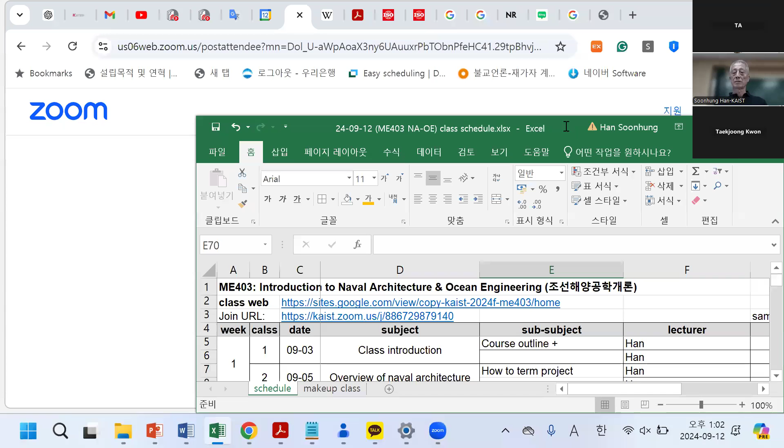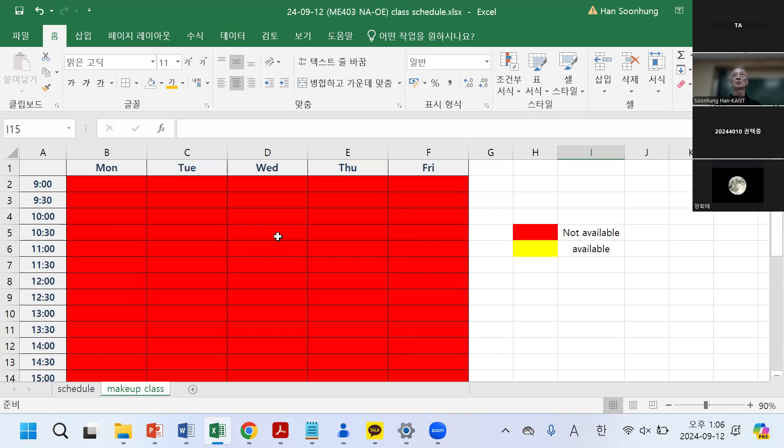Schedule conflict, unique or insurance program. We find out how can we treat, probably make the class hour. This is a previous semester result, so everybody has a different schedule. We find out an empty one. But this one, these two empty slots were found last semester. Similarly, somehow together with the TA, we find out empty slots so that we can use in emergency cases.

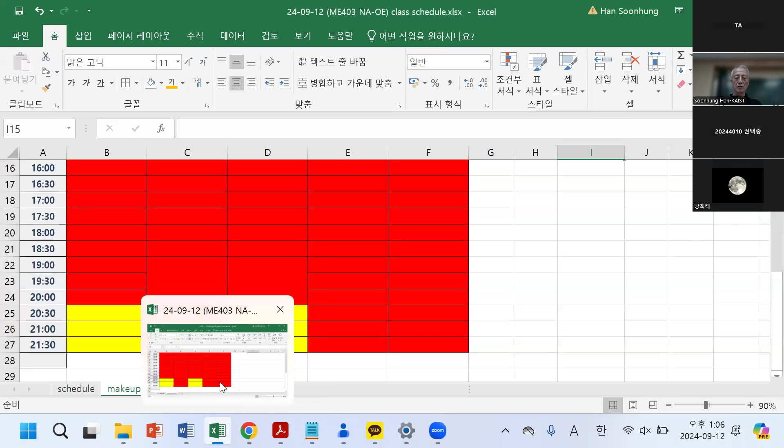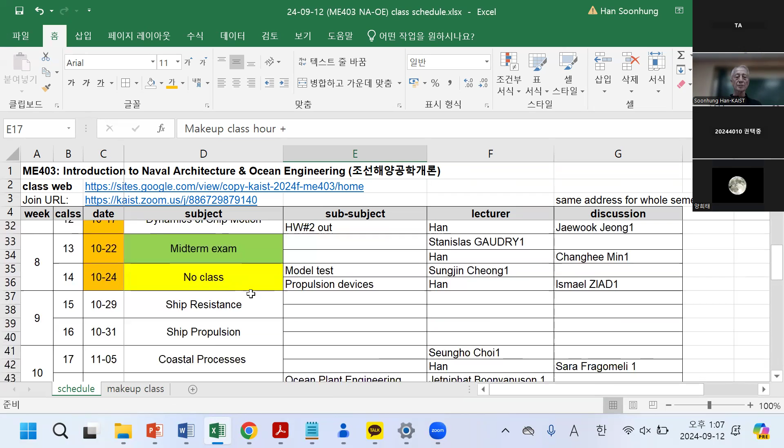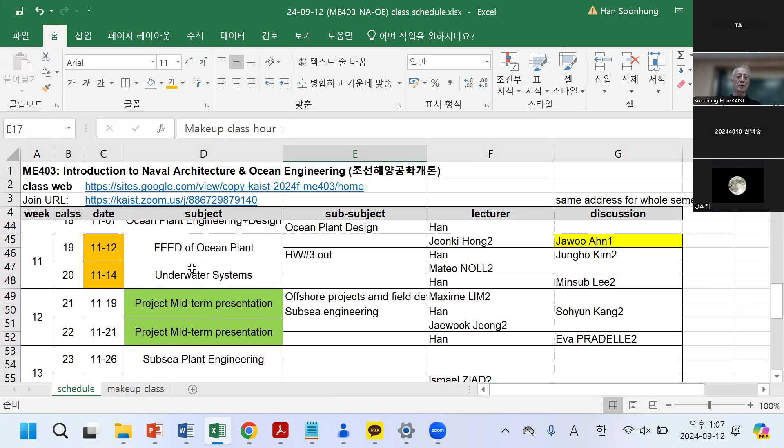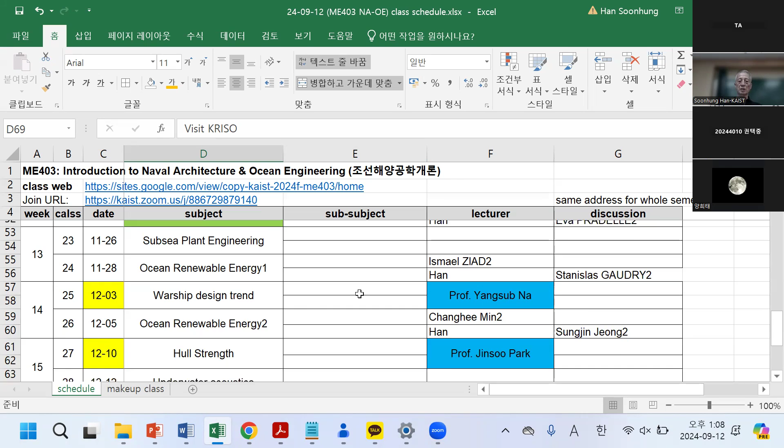And because the time slots are many available, so that we need to have a separate schedule for the increase. Last semester, I found that only half of you visiting KRISO. We may not use regular hours, we use separate hours, something like Friday or something, depending on your speech. And last time also we get a special lecture, and whether it's available.

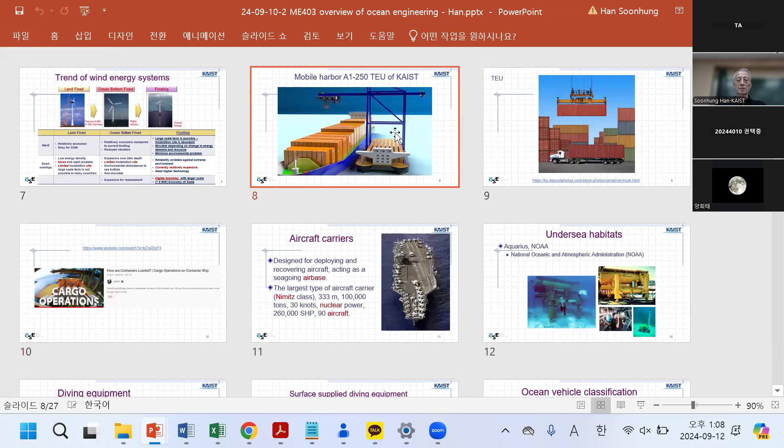We start here. Mobile harbor.

Well, this one is, you can say, a floating container, usually it's fixed. Moving container crane, it's a small container. It can be bigger, but depending on the situation, it's only 250 TEU.

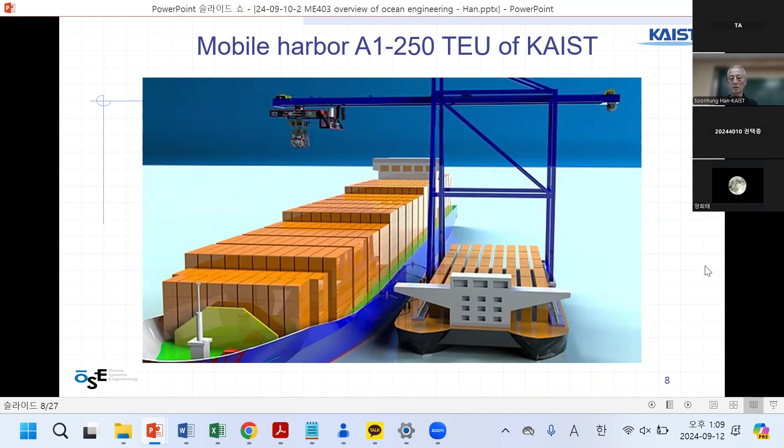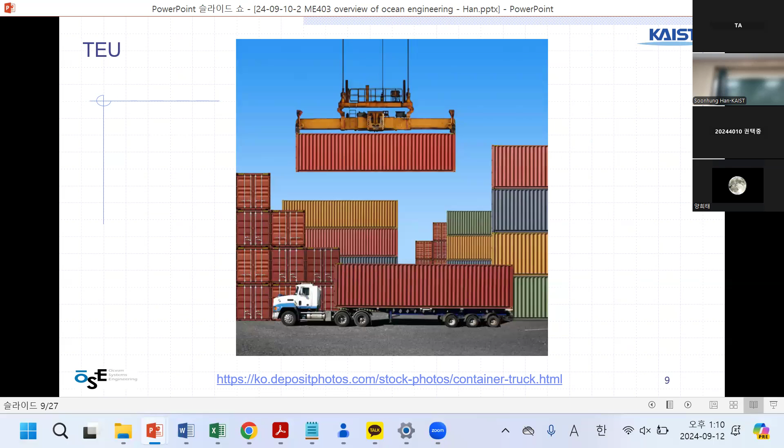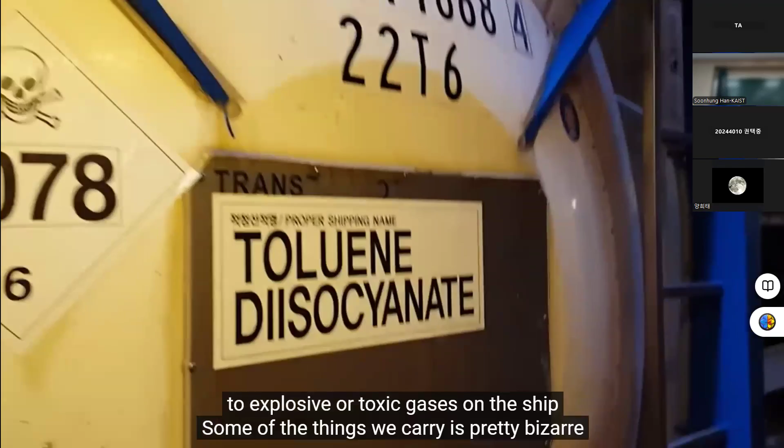Let me show you how containers work. It's possible that most things around you right now came from a container ship - the food you ate, the phone or computer you're looking at. We have anything from apples to frozen meat to explosive or toxic gases on the ship. Some of the things we carry is pretty bizarre.

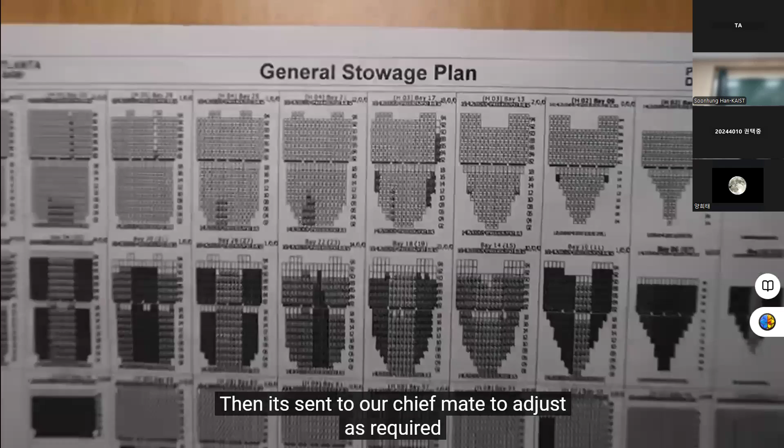But everything actually begins in the office with a team of people we call central planners. They draw up a cargo plan for the whole supply chain. Then it's sent to our chief mate to adjust as required. The containers are loaded by the port's crane. Some say they were used by the Empire.

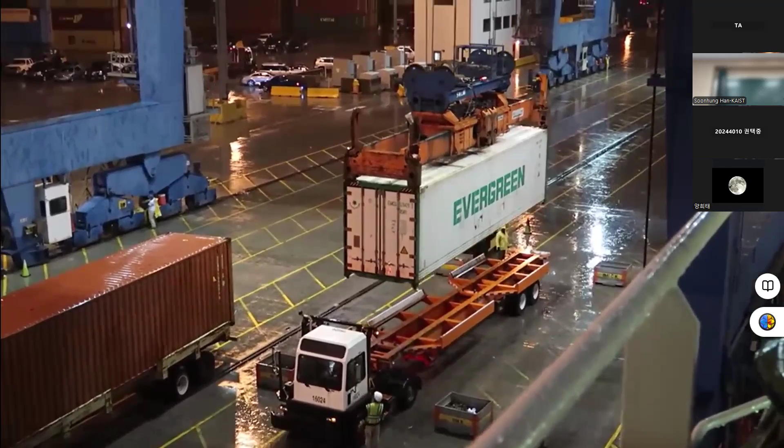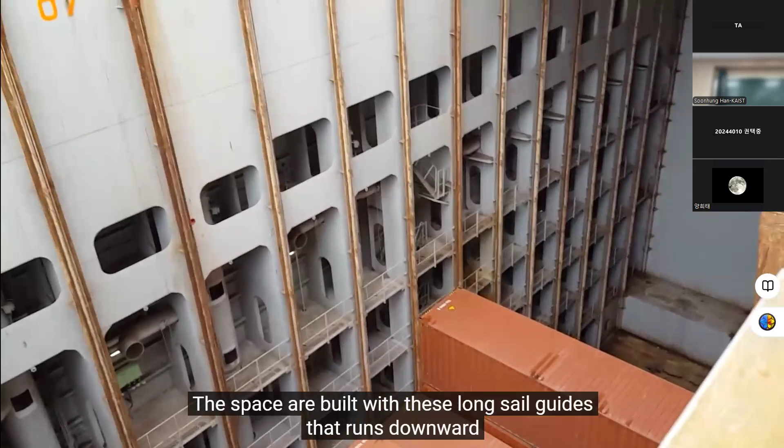Starting from the bottom, stacking up like Legos, these cargo holds can be as deep as 40 times 40 meters. The spaces are built with these long cell guides that run downwards, it secures the containers in place. And this is what an empty container hold looks like.

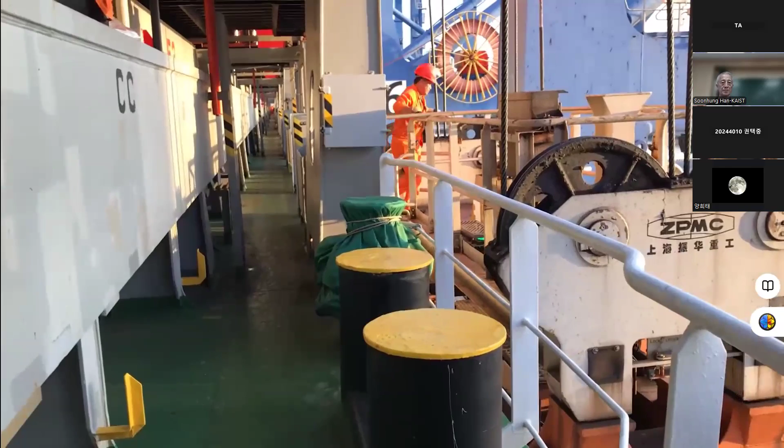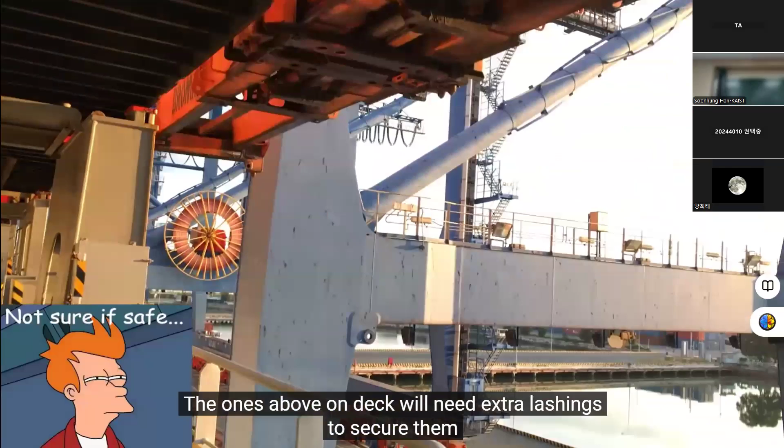Once it's filled, a hatch cover is placed on top so that more containers can be loaded. The ones above on deck will need extra lashings to secure them. Workers from the port handle the physical labor of lashing.

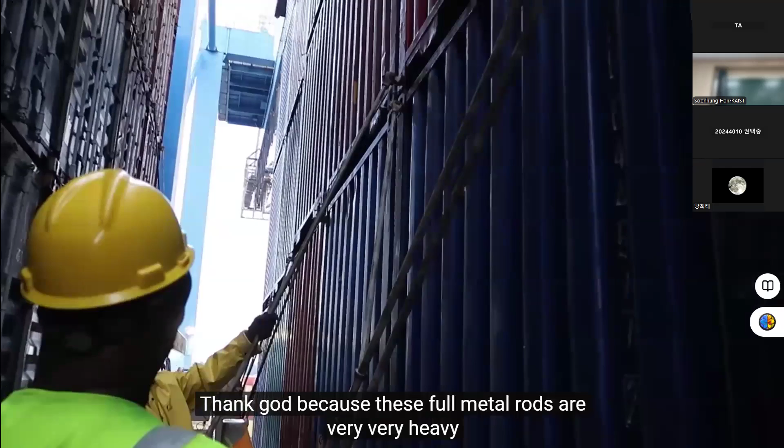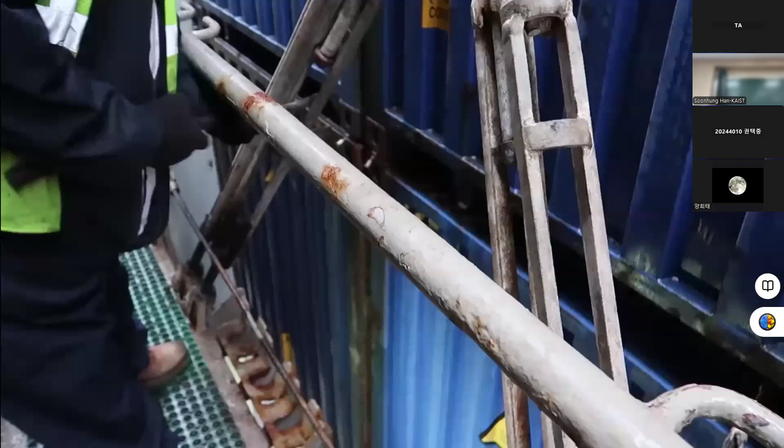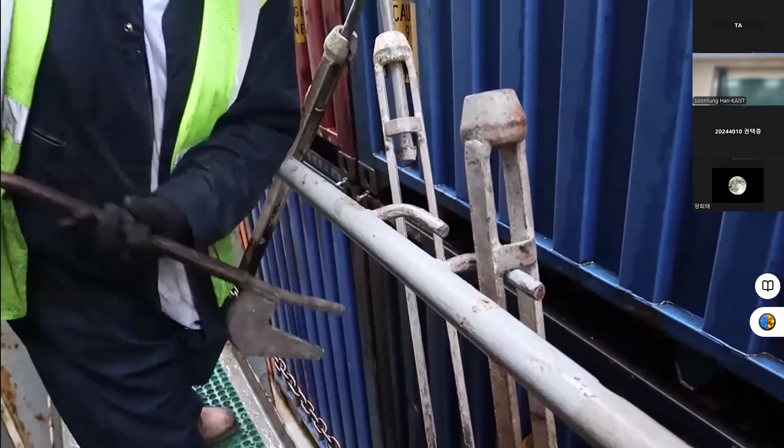Thank God, because these full metal rods are very, very heavy. Turnbuckles are twisted to tighten the steel rods. For that, we have turnbuckles, short bars, long bars, and twist locks.

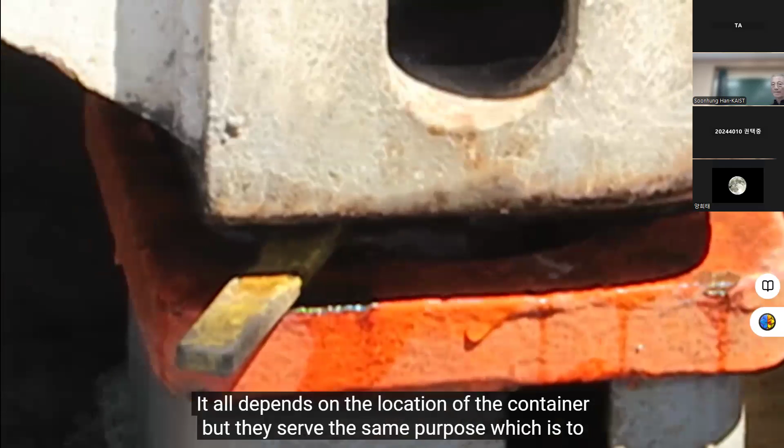There's actually a few types of twist locks on our ship. Some are manual, some are automatic. It all depends on the location of the containers, but they serve the same purpose, which is to lock containers. Once again, it really is just like stacking Legos.

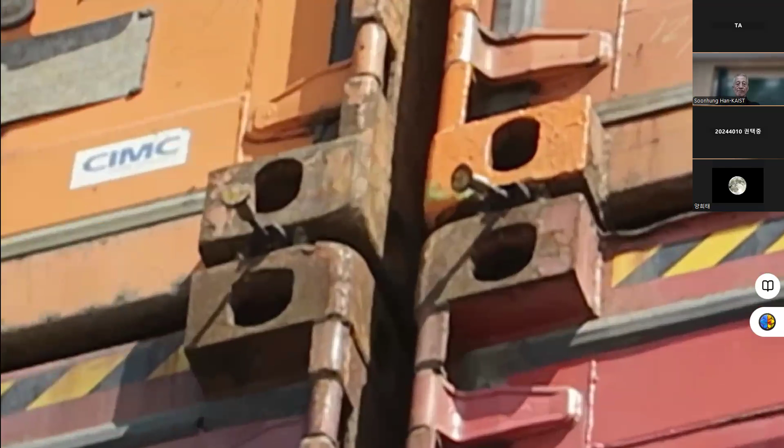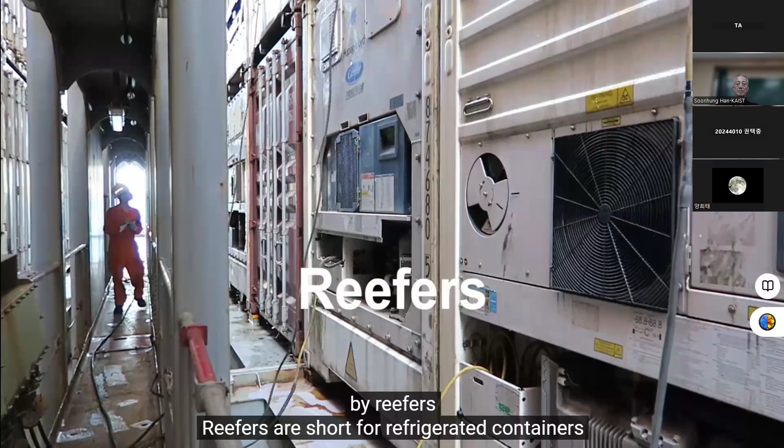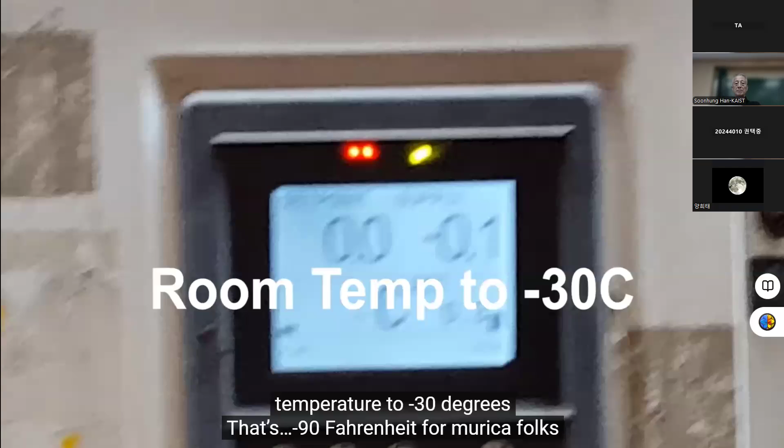The fruits and frozen products are transported by reefers. Reefers are short for refrigerated containers. They are pretty much a gigantic portable fridge. It can keep temperatures anywhere from room temperature to negative 30 degrees - that's negative 90 Fahrenheit for America folks.

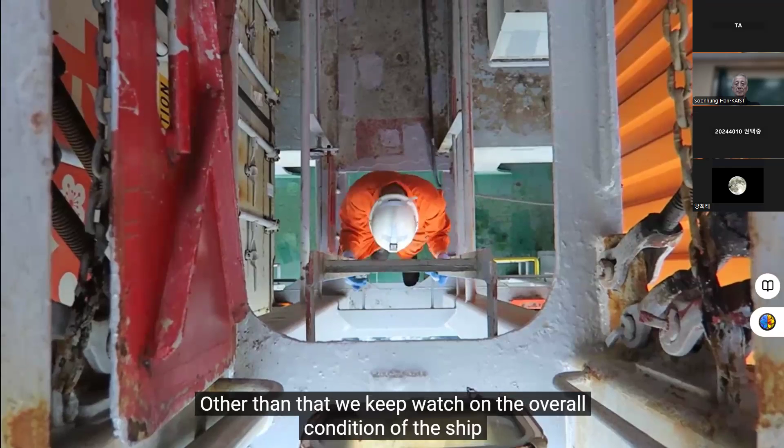So what's my part in all this? Well, as third mate, my job during cargo operation is to monitor the loading and discharging progress. Afterwards, checking the lashing to make sure it's done properly. The last thing we want are containers falling to sea if we ever run into bad weather. Other than that, we keep watch on the overall condition of the ship, including safety and security, checking the mooring lines and looking out for any suspicious activities like stowaways or pirates.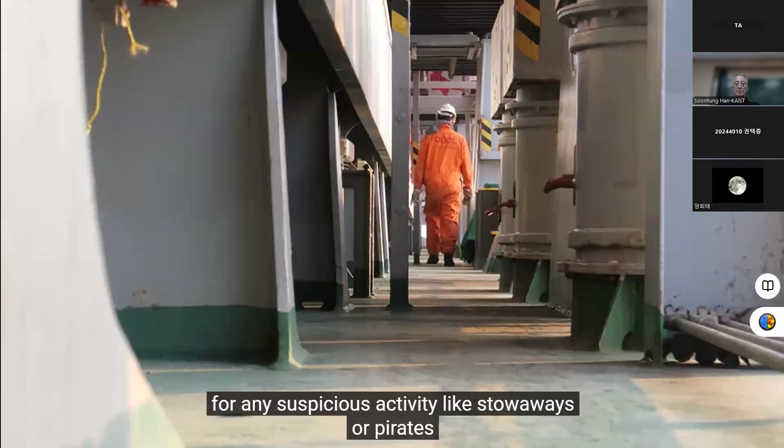So that was a general overview of how cargo operations are done on container ships. If you got any specific questions, make sure to leave it down in the comments below. And as always, thanks for watching.

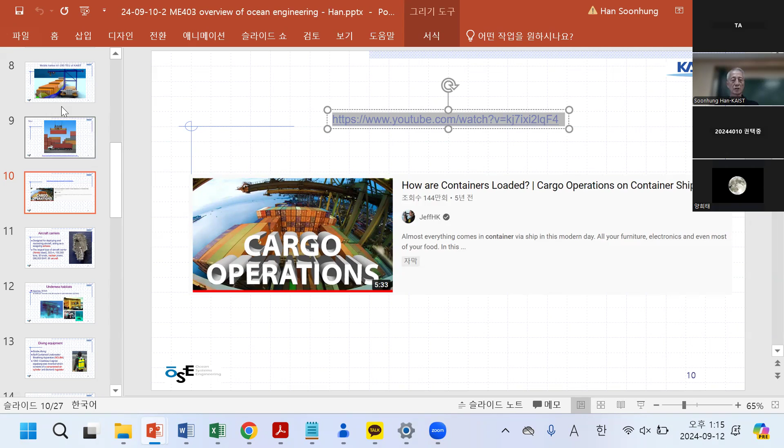Storage planning, because large container ships nowadays carry 15,000, 20,000, 50,000 container TEUs, containers per ship, one big ship.

So they start from Japan, Korea, China, Shanghai, Hong Kong, Singapore, then Middle East, and go to Europe. Otherwise, the other way is from Singapore to China and Japan to the West, Los Angeles, United States. From Far East there are two main lines, one toward Europe, the other to the West. But they visit several big ports.

At each port you need to unload 10% or 20% of the containers on board, and also load about the same amount. 10% or 20% means how many? 1,000 or 2,000 containers. But if you have not planned well which ones should be unloaded are far under the bottom stack, then you need to take out all the ones above, pick out and unload, then pack up again.

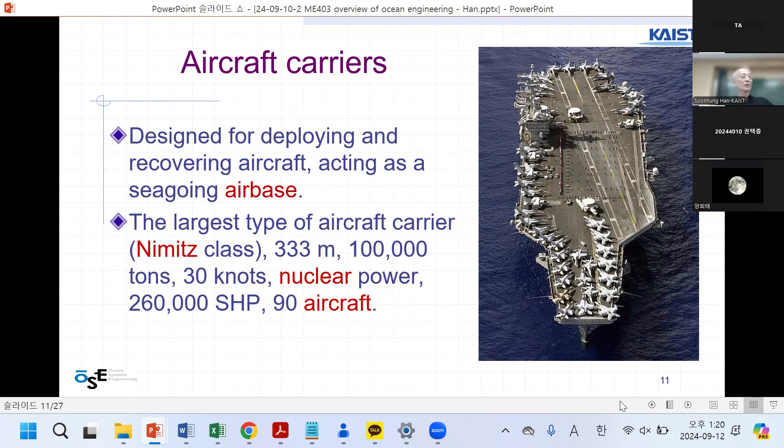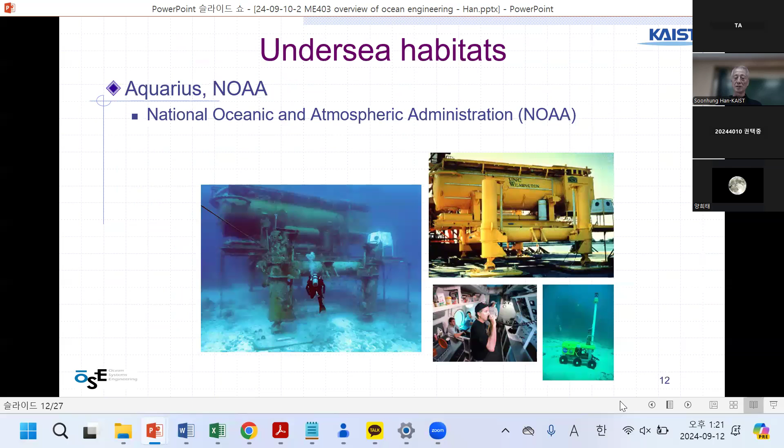It is for research and experiment. NOAA is the United States National Oceanic and Atmospheric Administration. We have experimental devices, scuba diving.

I noticed several of you have tried scuba. It's a short name for Self-Contained Underwater Breathing Apparatus. It was developed by a Frenchman, how many years ago? 60, 70, 80 years ago. He invented the compressed air cylinder and regulator, which means you need to pressure it down, otherwise the pressure is too high.

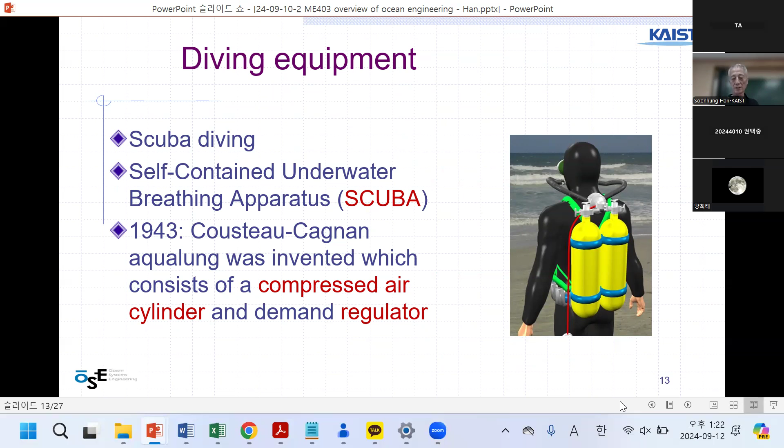You need to control the regulator, because if you go down into the water, the pressure gets bigger, right? Every 10 meters, one more atmosphere of pressure. So at 30 or 40 meters, it's 5 times. You need to turn the regulator and adjust, otherwise you cannot function.

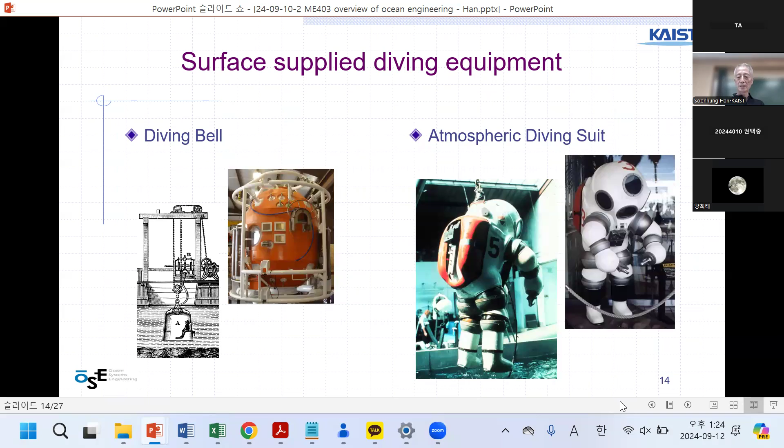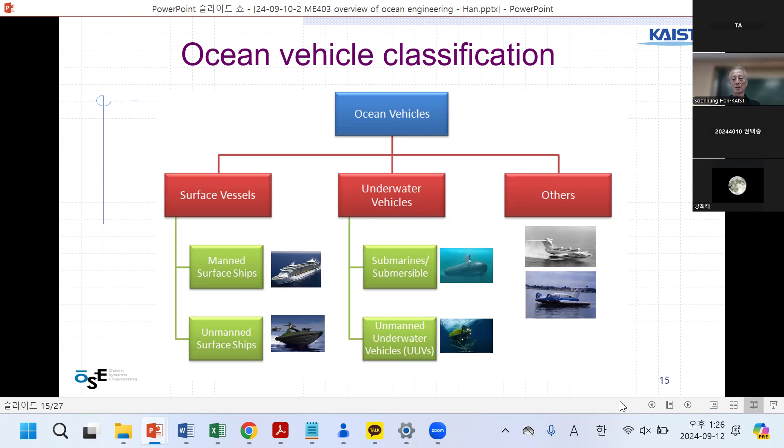Submarines and submersibles look similar, but usually submarines are used for Navy ships and submersibles for researchers. This one is from Japan, the Shinkai 6500, meaning this ship can dive to 6,500 meters. Because it's for research they need to go much deeper. Submarines don't need to go as deep, they usually stay around 100 or 200 meters.

I can't remember the English name of the book, continental shelf, right? Near the land, ocean depth is about 200 meters over the territory of a country. So Navy vessels need to stay around country lands. You don't always need to cross the big ocean, but usually the problem is coming near the continental shelf. So sometimes they go further, designing military equipment for higher access, probably several hundred meters or so.

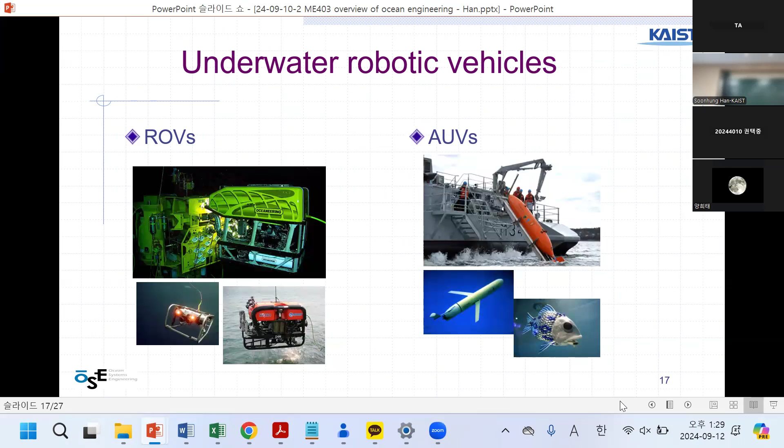Unmanned ships are coming nowadays because nobody wants to stay as crew for several months on a ship. It's not a good job.

I met a person who was working on a Korean container ship. He originally came from Russia. Somehow I had a conversation with him. He said his ship runs between Busan and Los Angeles, and it takes about 2 weeks to arrive at Los Angeles from Busan, I can't quite remember exactly. Anyway, he said the time changes by 1 hour per day, earlier, because of the economics of running the operation. They stay at Los Angeles for one or two days only, then return back over the 2 weeks. This time, the clock changes the other way, so 2 weeks means almost 12 hours of change. He stays on the ship for 3 months, then can have 1 month off.

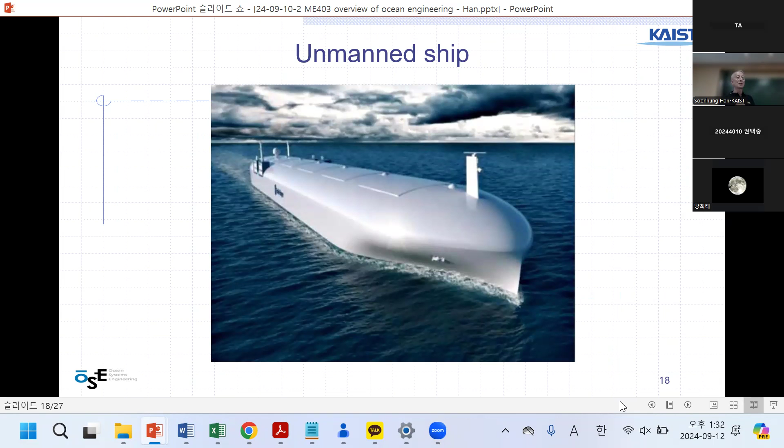Another idea from Rolls-Royce container ship design, we see that there is no pilot house, no captain. An ordinary ship should have such a high-rise captain space where the captain stays.

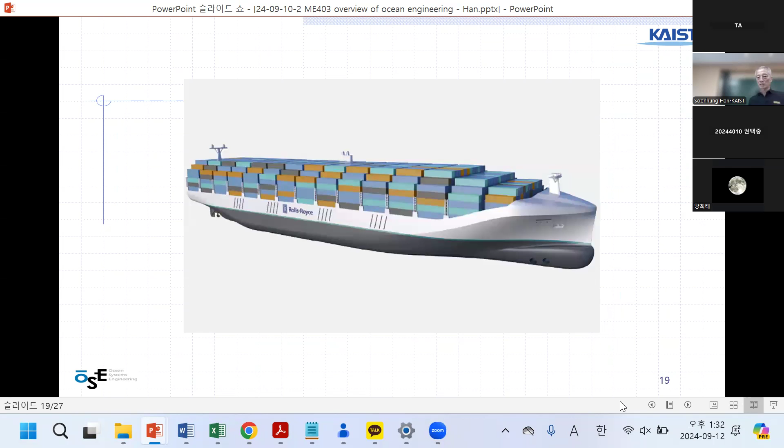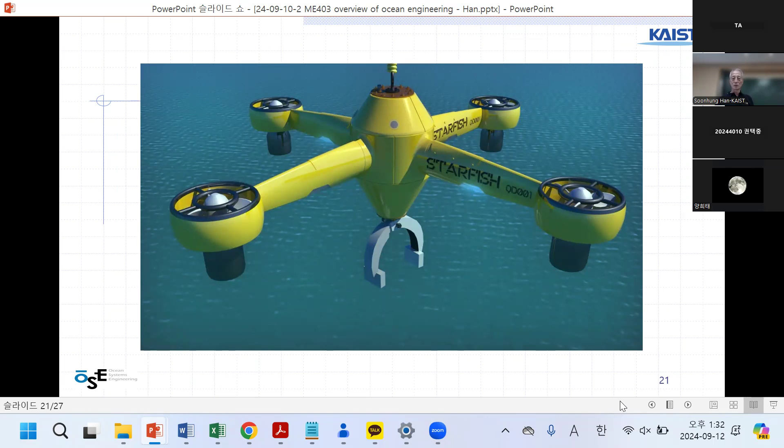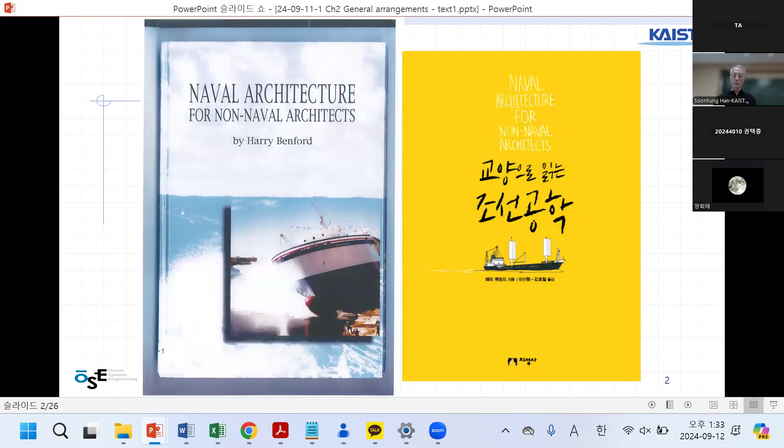So, general arrangements. This is covered in the first textbook, and the second chapter is general arrangements, principles and sample illustrations.

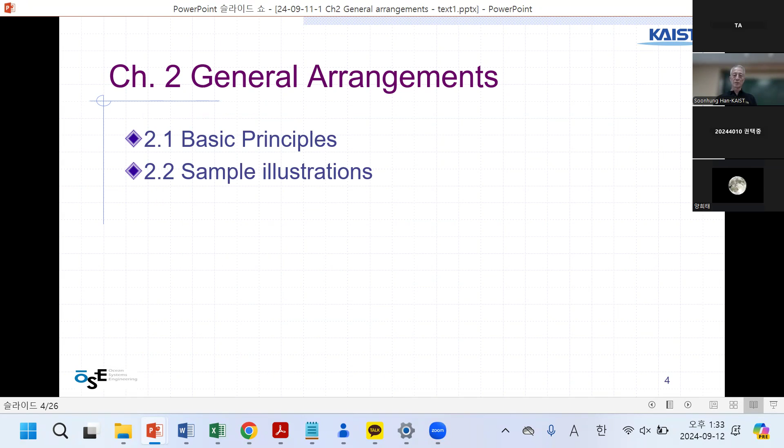When you have a job in a shipyard or shipbuilding company, you may be located in the R&D department or in the yard. There are thousands of drawings needed to build a ship. To build this building also, you need hundreds of drawings.

For each work per day, we need professional drawings for a single project. That's why we have many drawings. But the main key drawings of a ship are three. As a student, as a naval architect, you need to know how to draw these. One of them is the general arrangement, covered today. The other is lines, and the third is the midship section. We will cover this.

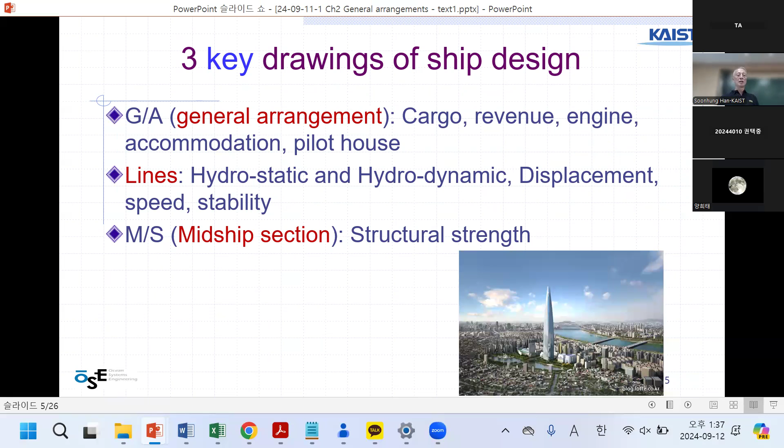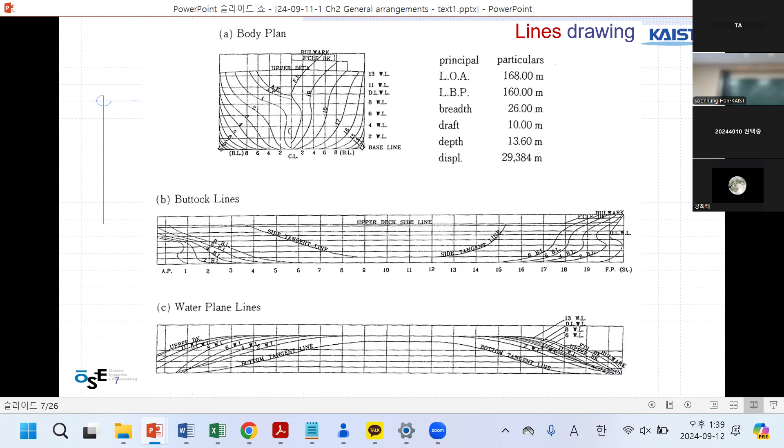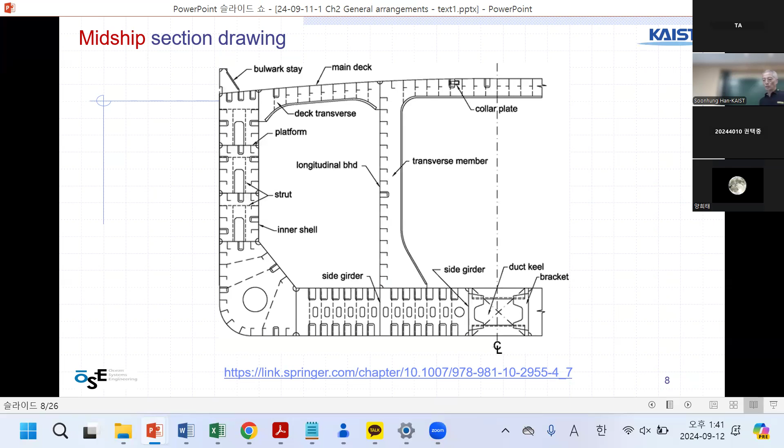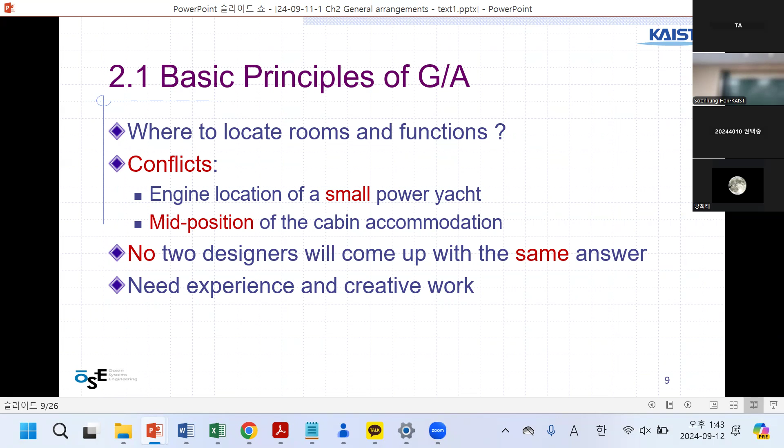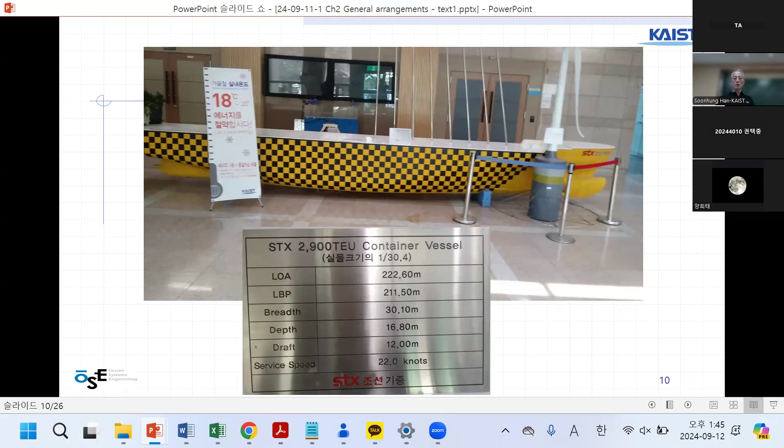The main cause of using that big swimming pool is to guarantee the speed for the ship. Otherwise it's not easy to expect or estimate the engine size for the speed from your design. So sometimes you may try to visit such facilities.

Principle: primary function should govern the design. Very reasonable. For example, a fishing boat - start by locating the fish catching equipment. But fish catching has different ways: hooking or netting, and netting can involve cruising and putting devices out and collecting them back. There are many different ways of catching fish depending on the fish types - very complicated. That's why you need a different device for catching fish, and the device is important for fishing vessels.

Similarly for cargo ships, cargos are different. Container ships use cranes for cargo handling. How can you handle the cargo, and then move it off the ship - loading and unloading through openings, or with no openings at all. You see that with cargo ships, and then there's location.

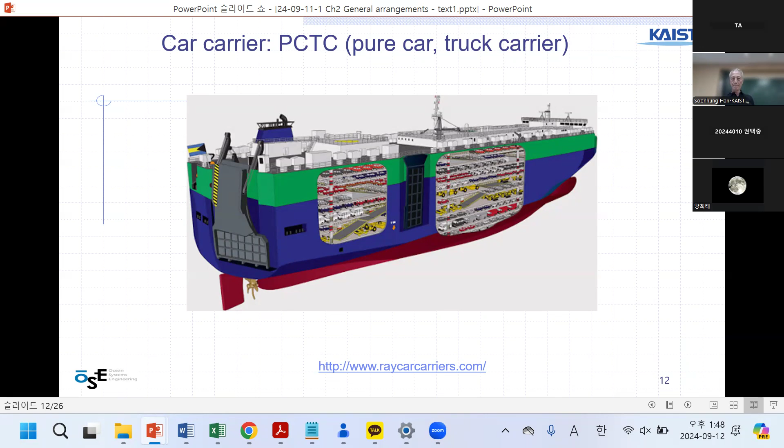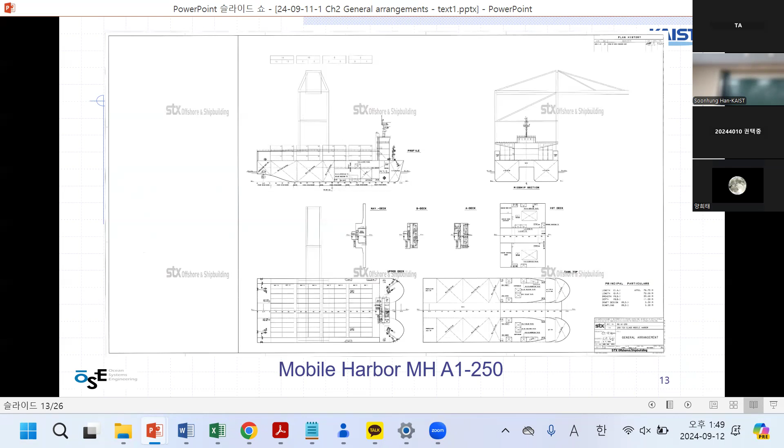When I was young, I was working in KRISO, the research laboratory. At that time, my duty was to design a new small fishing boat - 50 years ago, 40 years ago, a long time back. At that time, fishermen in Korea were very poor, so they didn't have enough money to buy an engine-powered fishing boat, which was very expensive. I found that the diesel engine for a fishing boat was 3 times more expensive than a land-based bus diesel engine for a bus or truck, with the same power, same horsepower. So as a young engineer, I wanted to use that land-based engine rather than a specialized fishing boat diesel engine.

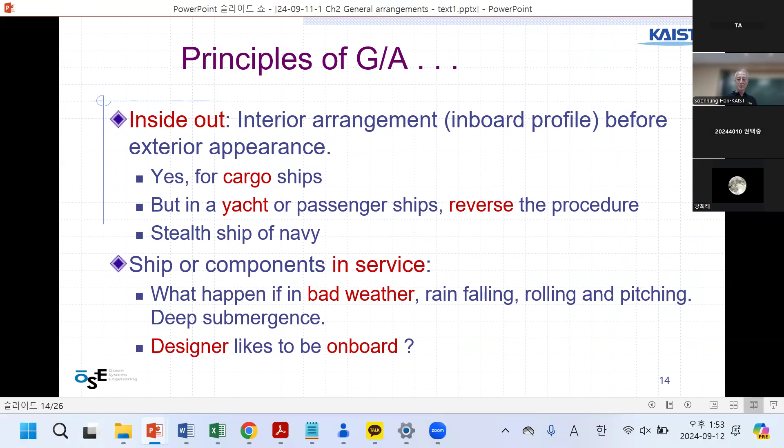Stealth ships - this is a Zumwalt class Navy stealth destroyer. It's a type, size, and function class of Navy ship. It has a stealth function - note the name or class name. You see this one has a different angle. The shape is very different - usually ships have a straight superstructure, but this one has a reverse angle to create the stealth function.

Why? Maybe because it reduces the radar cross section, giving less chance of being detected by radar. Radar works by shooting electromagnetic waves, and the returning wave is detected, right? But with this shape, the wave goes off into other space.

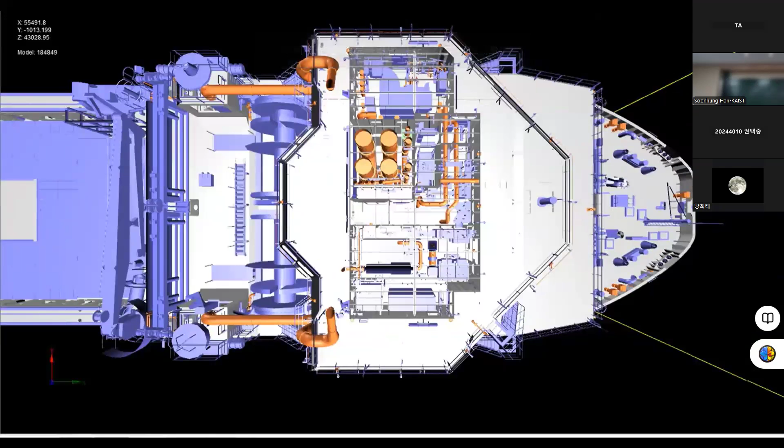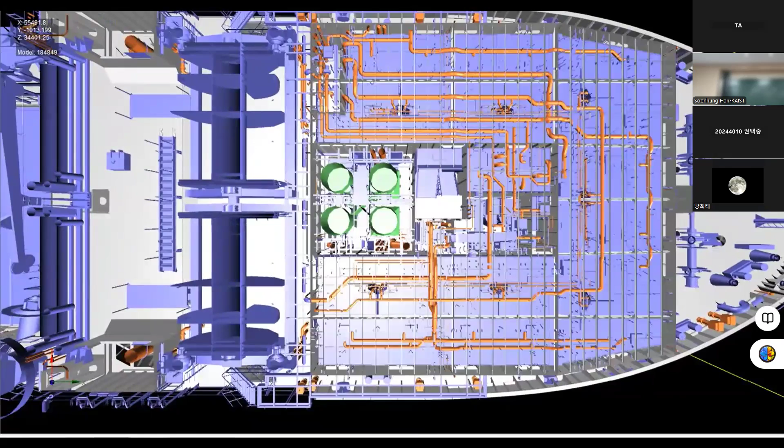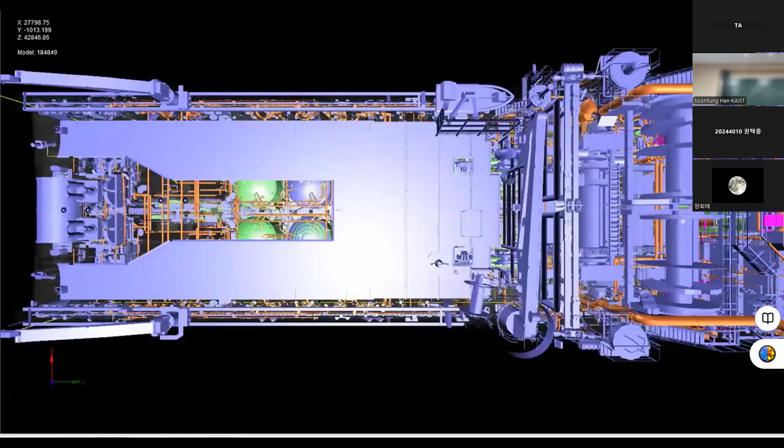This shows a very good quality CAD system compared to design systems of the past. When I was a student 50 years ago, we drew general arrangements with pen and pencil. Nowadays, computers do this. You can see this one is already finished, and you check whether the design is good. The function shows you can go down floor by floor, or up, everything together depending on your need. That is the high quality CAD system for ship design.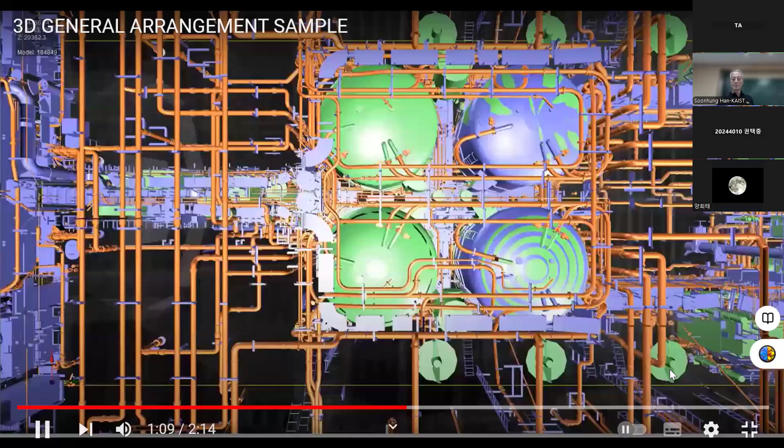Looks like an engine room. Only the piping is shown here, so you can select what you want to see, highlighted by color changes. Only this unit shows the engine. It looks like 4 diesel engines are used for 2 propeller shafts. There should be a propeller here, and exhaust gas goes out.

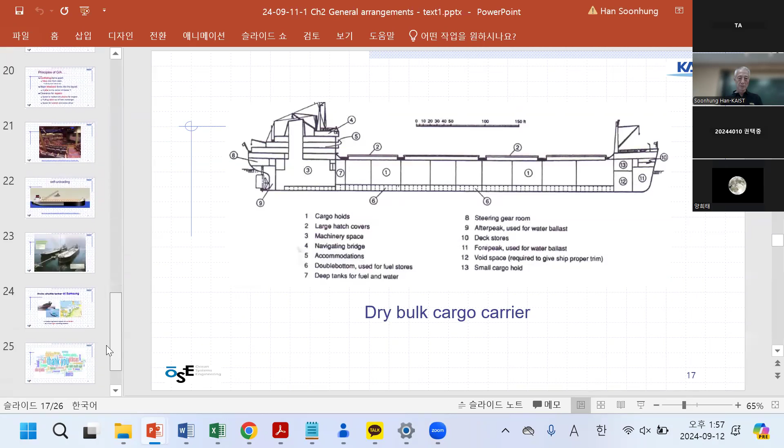As an experienced designer or engineer, if I see the picture, I can tell what type of ship it is, because they have special factors. This one is a dry bulk cargo type - dry, not wet. Wet means oil, chemical, or LNG carriers.

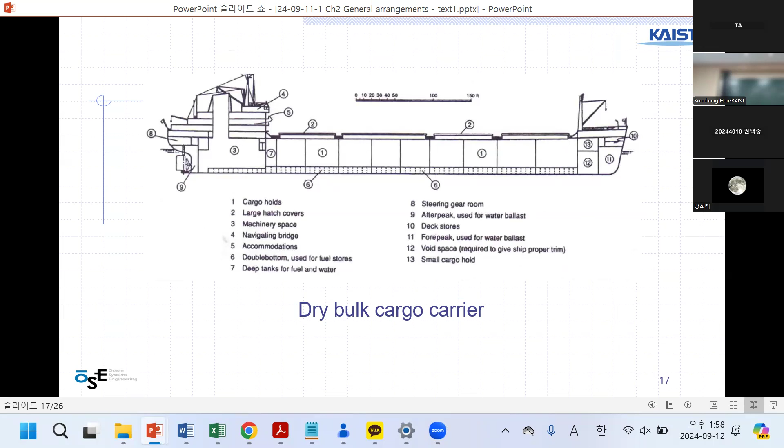This is a sample of bulk cargo, with pilot house and cover tank.

If you go shopping at a supermarket to buy candy or peanuts - candy is bad, peanuts are also bad nowadays - but at some corner you can make your measurement with such peanuts. We call this dry bulk sample.

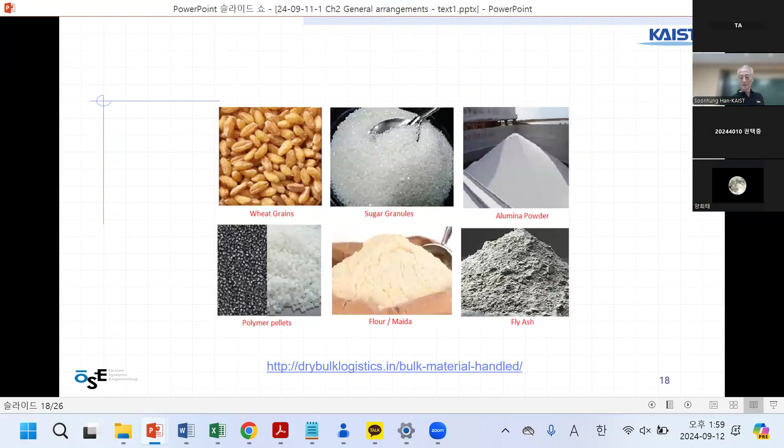For ships, this is a dry bulk cargo ship. It has hatch openings - you use a device to open it this way, each cargo hold opened, and they put grain or ore in it. Ore means for steel-making companies, you need to import it. Korea imports ore mainly from Australia or Brazil, so it's heavy and bulk.

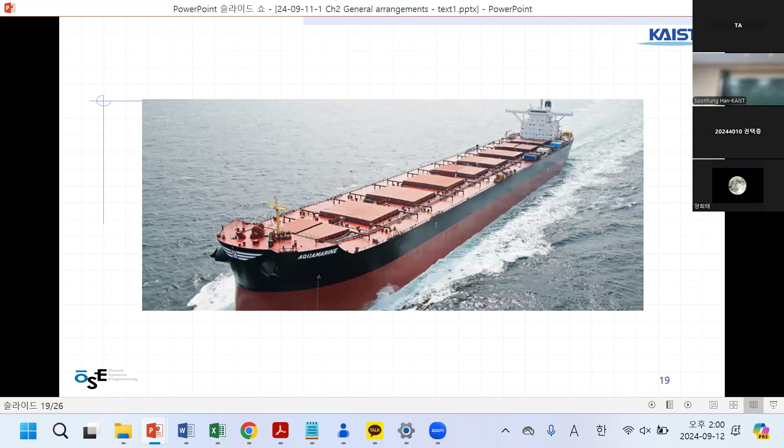Conflicting items should be kept far apart. Noisy items should be away from the cabin, meaning accommodation - engine and accommodation should be separated. Cooking should stay near the food storage house. Toilets should be in a convenient place.

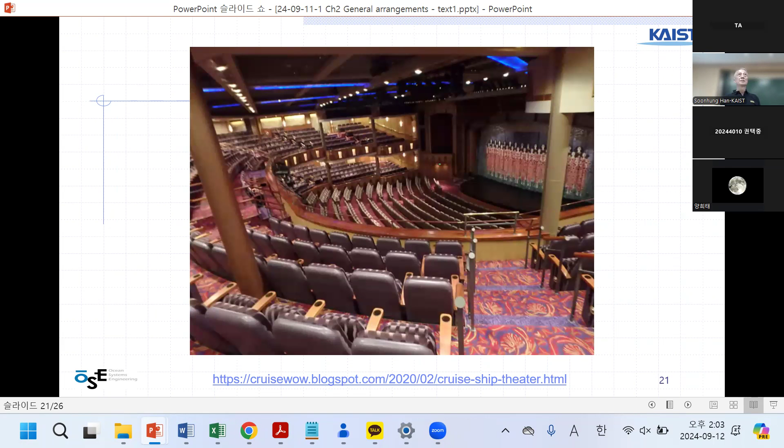Say this is grain or rice grain. When loading to the ship, there's a high tower tank of grains, specialized towers, grain tanks, and then they have a chute. Because it's high, they pour down the grains to the ship very fast. Similar to this, coming from the tower tank and then going to the ship.

But unloading is not easy from the ship to the inside. That's why they have the idea of a conveyor at the bottom of the ship, automating the pouring. So faster unloading, right? Automated unloading. The problem is the cost of conveyors and the boom, special engines, energy for the conveyor, and also the space for the conveyors is lost, so your cargo space is reduced.

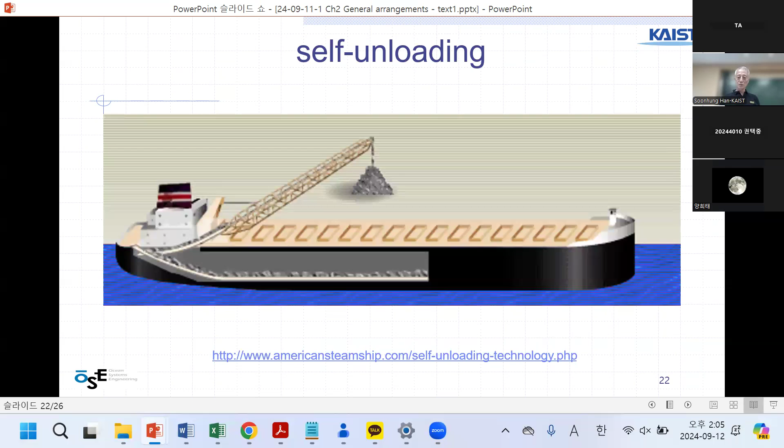And then there's the water depth to consider. For a big ship like this, I'd expect the depth can be more than 30 meters. The ship comes fully loaded to Korea, from Saudi Arabia, Kuwait to Korea, fully loaded. Then water depth should be more than 30 meters. But there's shallow water in the Yellow Sea, Incheon Airport, Incheon Port - that's why there were jetties and pipelines.